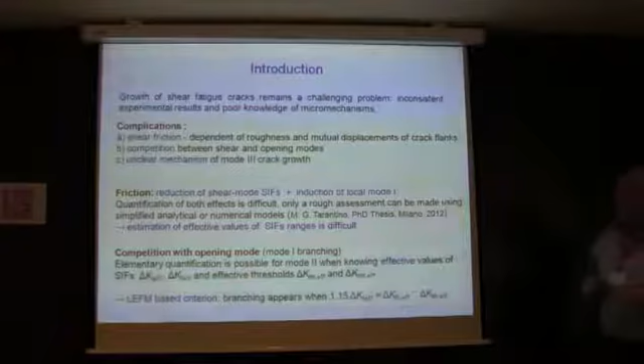Many things were done for mode 1 cracks, fatigue cracks, closure and things like mode 1, but not so much was done about shear cracks. The reasons are there are some complications, more or less stronger than in the mode 1 case.

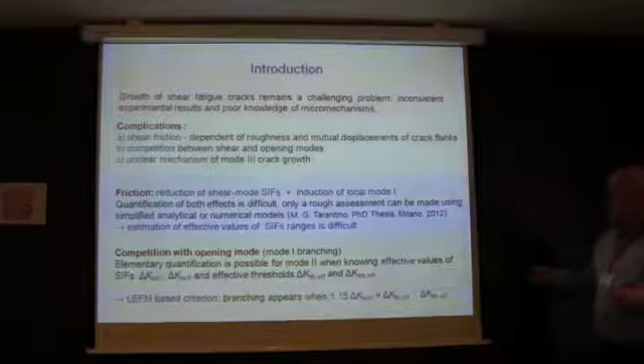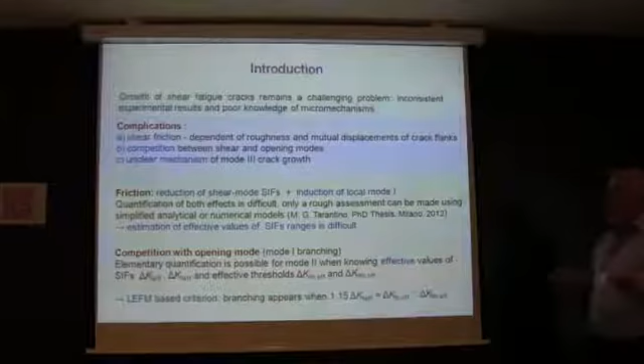First, this is shear friction, which depends on roughness and mutual displacement of crack flanks, material, and many other parameters. Then there is competition between shear modes, especially both shear modes 2 and 3, and mode 1. There is also a more or less unclear mechanism of mode 3 crack growth in a shear case.

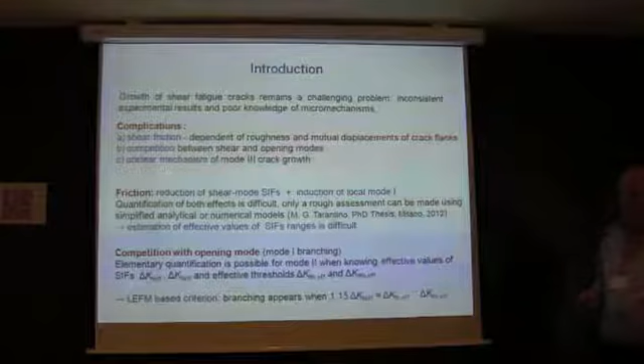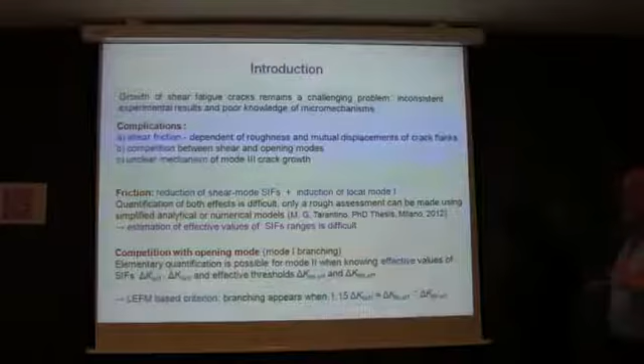The friction reduces the stress intensity factors at the crack tip, and moreover, it induces a local mode 1. So this is a quite complicated case, and quantification of these effects is difficult. Just rough assessment can be made using some analytical or numerical models.

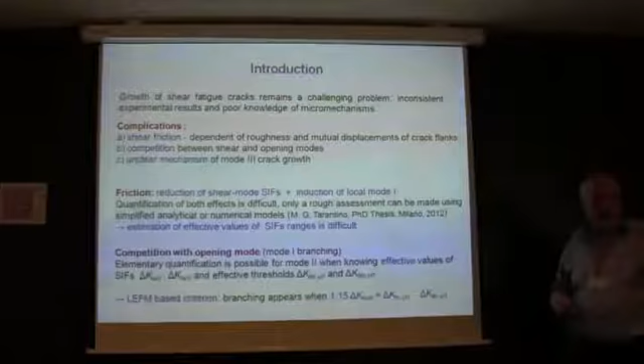An overview was done, for example, by Tarantino. I was in Milan at that time, and that was a good PhD thesis. But the estimation of effective values of stress intensity factors due to that problem is rather difficult.

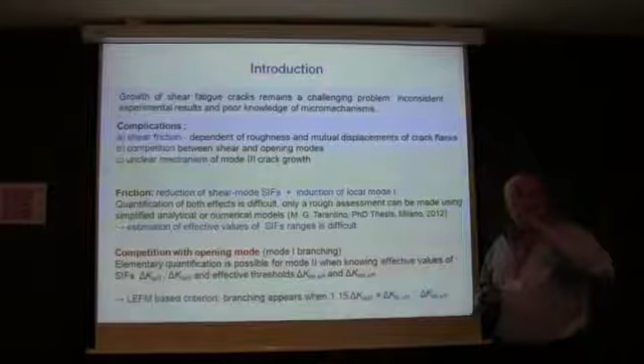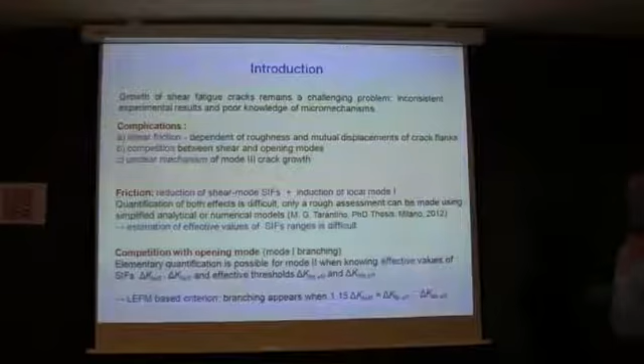There is a competition with opening mode, because some shear cracks tend to branch into the mode 1 direction - that's a well-known phenomenon. Elementary quantification of this effect is possible, but you have to know the effective stresses again.

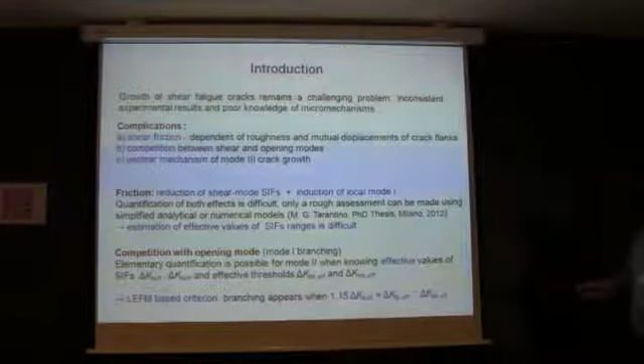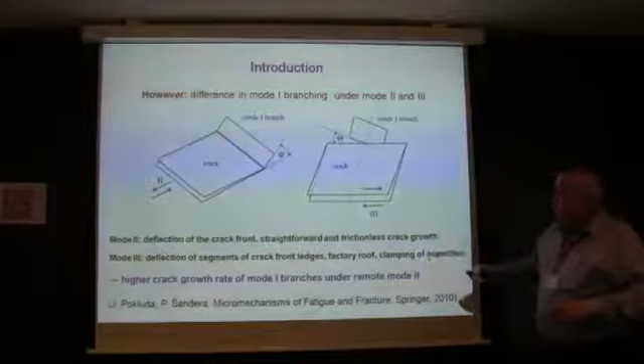Now there is a difference between these two modes in a geometrical sense. If you have just mode 2, like this, in the ideal case, the crack can deflect like this, and you get a common line between the crack and the branch - so this is not so difficult for the crack to deviate to mode 1.

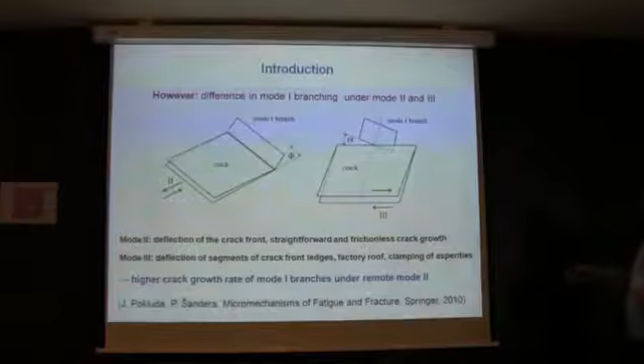But in the mode 3 case, you actually have to twist the crack to get the mode 1 support. This is more difficult because there is one point here. So in mode 2, deflection of the crack is rather straightforward, and you can get a rather frictionless shear crack growth in mode 1. In mode 3, you just have to twist the crack.

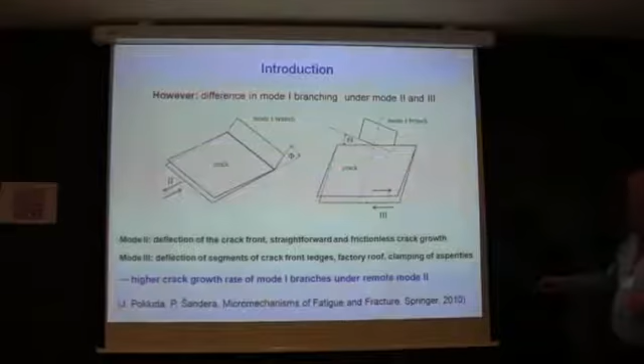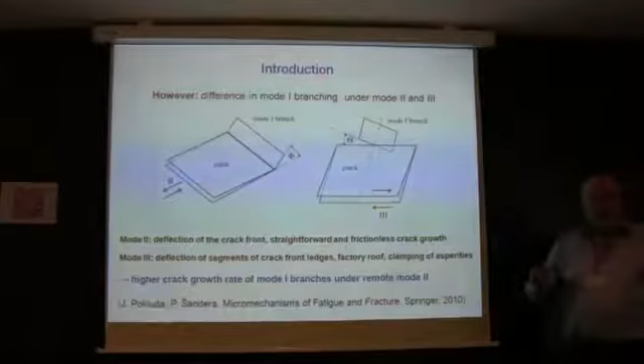This happens on the ledges of the crack, or asperities, where you can get a twist like that. This leads to a factory roof morphology in mode 1. But if you get this morphology, you have a clamping of asperities in mode 3.

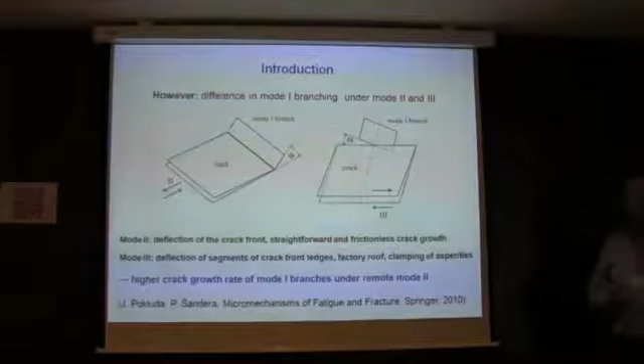This actually reduces the crack growth rate, and nowadays there are more or less good engineering applications of this case. For example, at the Gaeta conference, Tanaka was speaking about the clamping of cracks and its effects, because you get an inverse notch effect in fatigue. That was really a nice presentation.

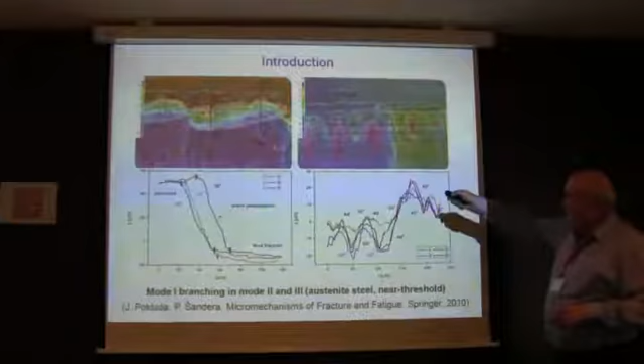Now, how does it look like? This is actually 3D stereophotogrammetry made for a mode 2 crack and branch. This is the branch, this is the pre-crack here, this is the mode 1 branch of mode 2, and this is just the final fracture. This is the profile, like this, and this is the branch - you can see that it's approximately 65, 60 degrees.

The theoretical value of the branch angle is 70 degrees, and you really get mode 1. So this is very close to this value of 70. This is really mode 1 branching in mode 2. This is in austenitic steel, near threshold.

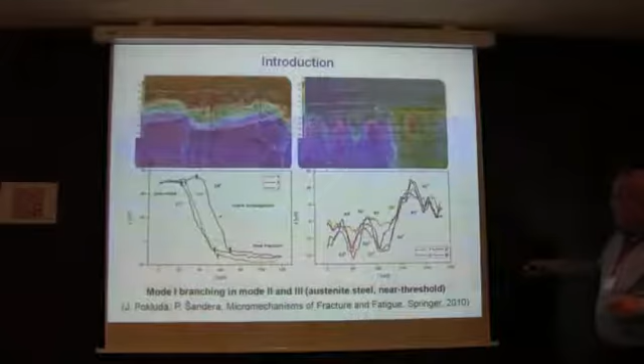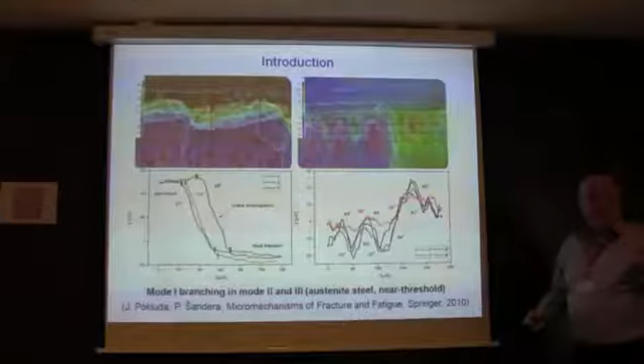And this is the mode 3 case. You see the profile like this - this is a factory roof profile. And again you get angles like 40, 45 degrees. That's the theoretical angle for mode 1 branching in twisting. So really mode 1 crack, factory roof.

But this is a big difference, because here you have a smooth crack. The crack can somehow propagate like this without any friction, but in this case it's like this - this is more difficult.

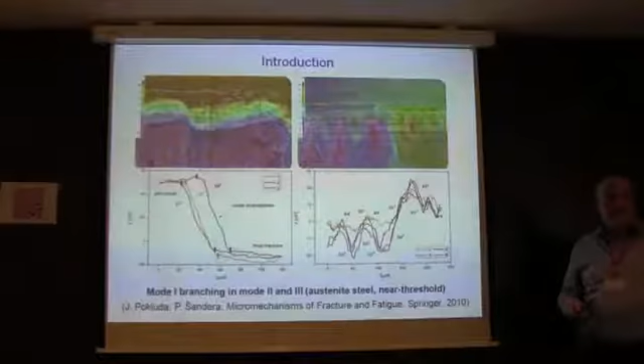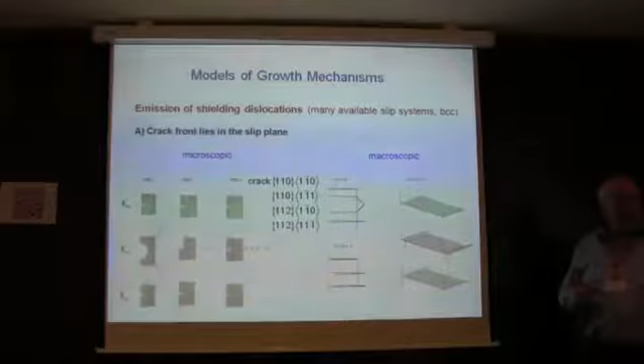Now, something about the models. Actually, at the moment you have two basic micromechanistic models of crack propagation. The first one is well known - it's emission of shielding dislocations from a crack tip, causing blunting of the crack in the mode 1 case. So this works, I will mention it later on.

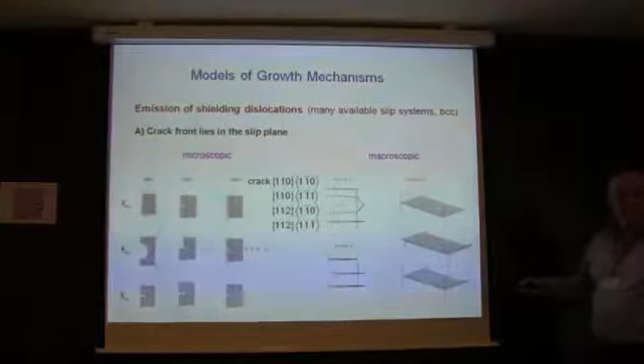This works rather for BCC systems where you have many available slip systems with small angles in between. But the models concern very simple cases - this is the simplest, well-known case. You can have a crack-slip configuration like this for BCC metals, and in mode 1, this is mode 1.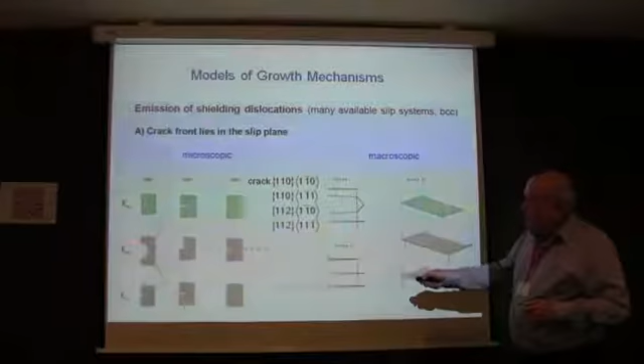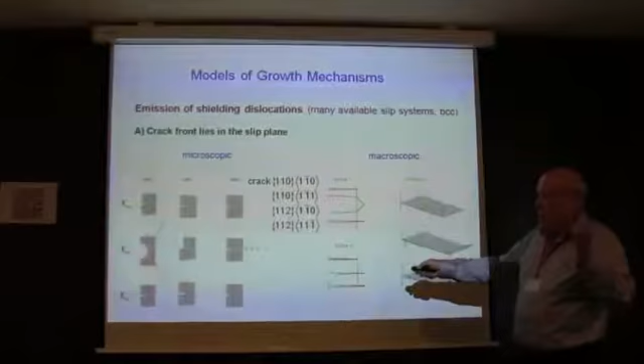So this is blunting by emission of edge dislocations, shielding dislocations, and new surfaces are created here. In mode 2, the same happens in shear - emission of in-plane edge dislocations, and again creation of new surface which is not recovered, except by environmental effects. And you can get crack propagation.

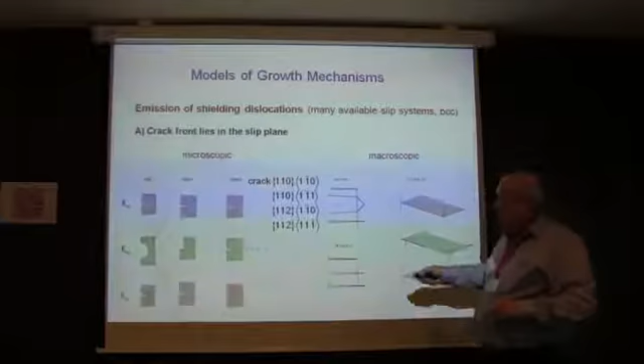But in mode 3, in this simple model, you actually emit screw dislocations, and they are not able to create any new surfaces ahead of the crack. They create - in this macroscopic model - steps at the edges, not ahead of the crack. So this simple model doesn't explain mode 3 crack propagation at all. But this is really the simplest model.

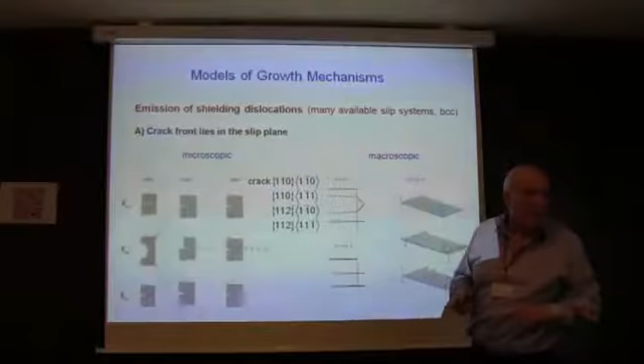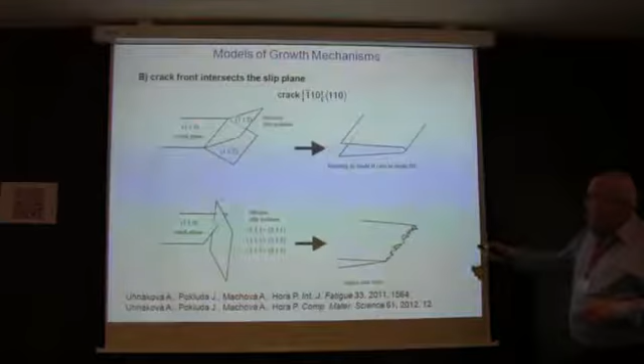You can have, of course, many other cases of slip plane configuration, especially in polycrystalline material. So we analyzed this more difficult case - a crack like this. If you have a crack plane minus 1, 1, you have two possibilities for shear cracks. This is mode 2 - you have two slip systems inclined like this.

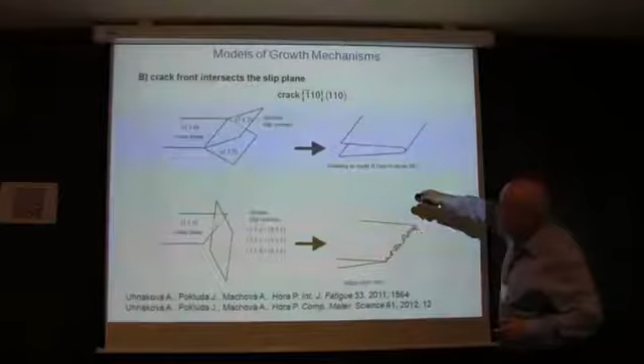So in this case, mode 2, you apply the shear like this, and you can get blunting as in mode 1. But this is not possible in mode 3, because the shear is applied like this, and the Schmid factor is 0. So this is not possible in mode 3.

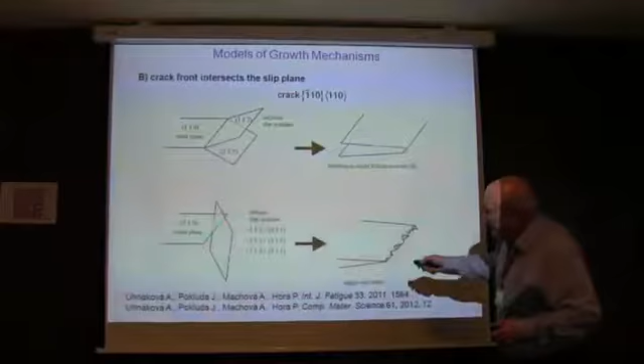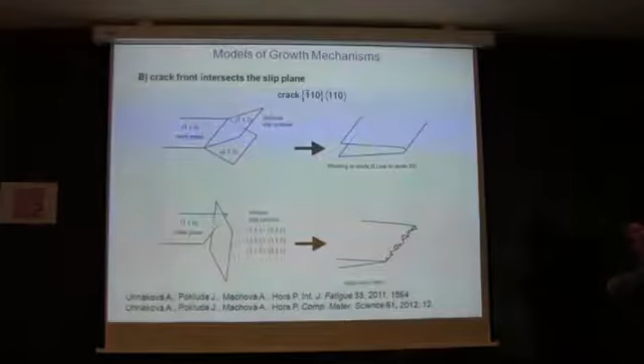But if you have a slip system like this - not deflected, but inclined, oblique slip systems, like this for example - you can get dislocations on those oblique systems, interaction of dislocations, and you get steps at the crack made by this. In a process zone here, you can get interaction of dislocations and creation of vacancies and twins, and other effects, because we modeled it with a molecular dynamics model. So you can create small cracks inside, and then the crack propagates with the coalescence of the main crack and the small cracks.

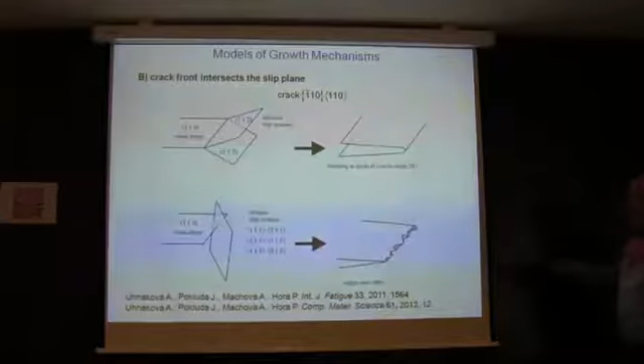So in this case, both mode 2 and mode 3 can propagate with a similar mechanism. Anyway, this was the emission model, or what we also call the deformation model.

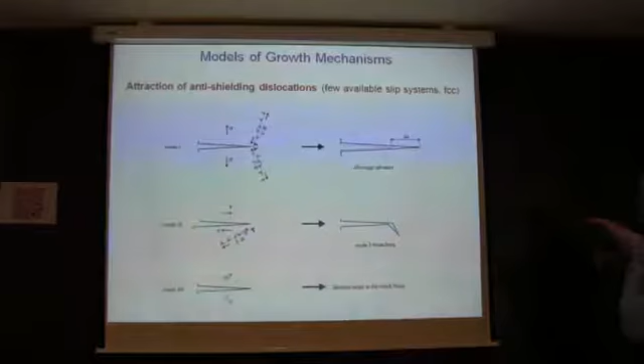But there is another model that works if you do not have too many available slip systems around the plane of maximum shear. This is the case for FCC systems, where the available slip systems are at 70 degrees, which is too much.

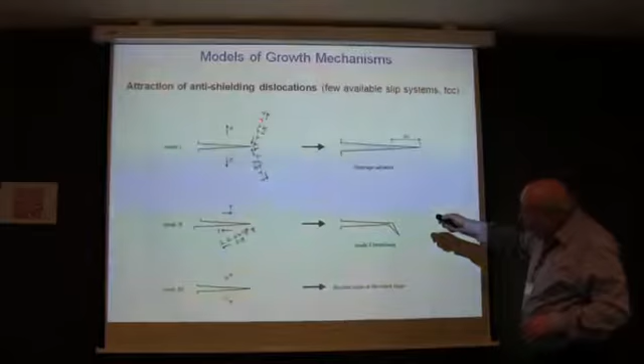And so Needleman and others proposed a model based on anti-shielding dislocations - meaning absorption of anti-shielding dislocations. They proposed it for mode 1. This involves external sources of dislocations, and in that case, if you would like to open the crack, you have to absorb the anti-shielding dislocations.

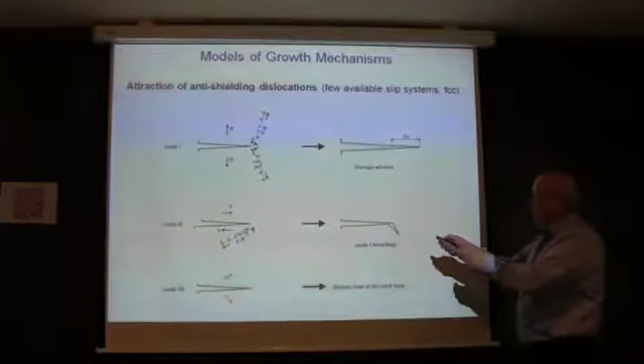So what can happen? If some anti-shielding dislocations come from the external sources to the crack tip, they apply an internal tensile stress field on the crack, which can be superimposed with the axial stress, and the crack can propagate by decohesion - say, a nano-cleavage, like this.

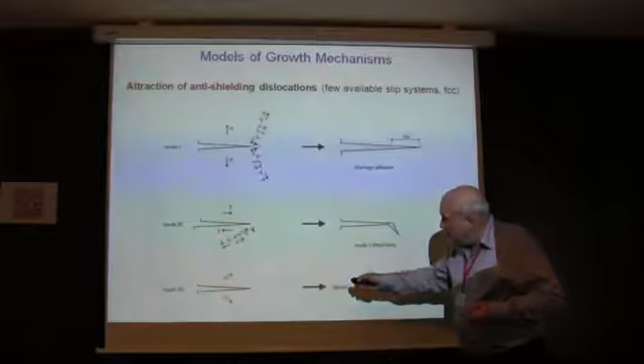But what happens in the mode 2 and mode 3 case? In mode 2, approaching it like this, you can have the anti-shielding dislocation like this.

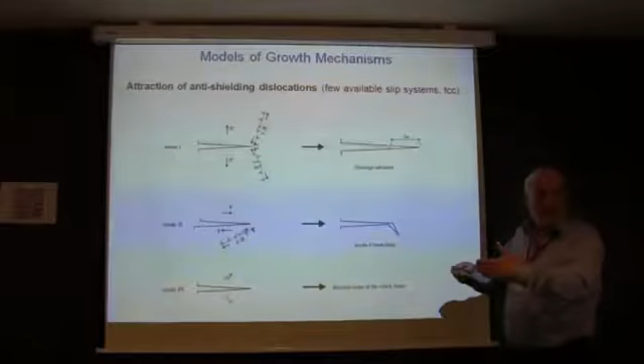The problem is that if you superimpose the external and internal crack field, you don't have any superposition of normal stresses. But if the crack would propagate like this, that's a branching, mode 1 branching. In that case, it immediately becomes a support of external mode 1, and you can have a superposition. So this model predicts a branching of the crack in mode 2.

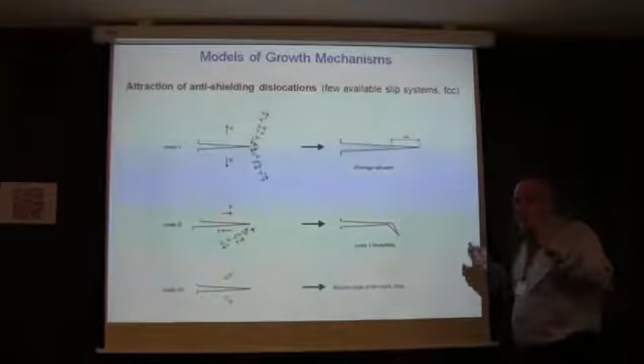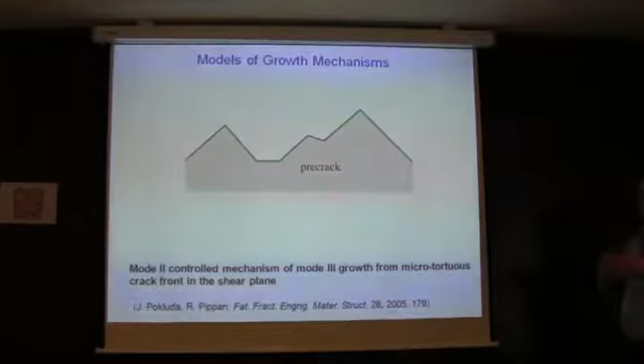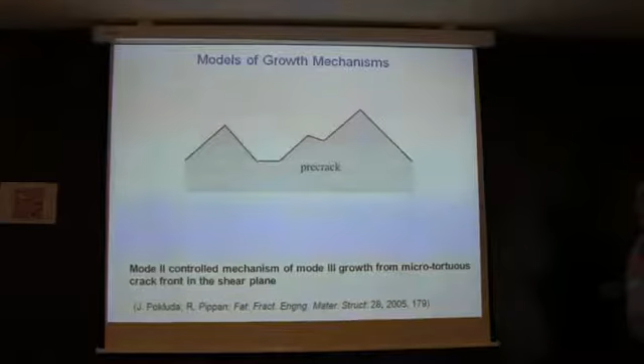So in summary, we can say that maybe mode 2 should be faster than mode 3 for many reasons I showed you. So many years ago, we actually tried to somehow explain how the crack in mode 3 can propagate just by mode 2 steps.

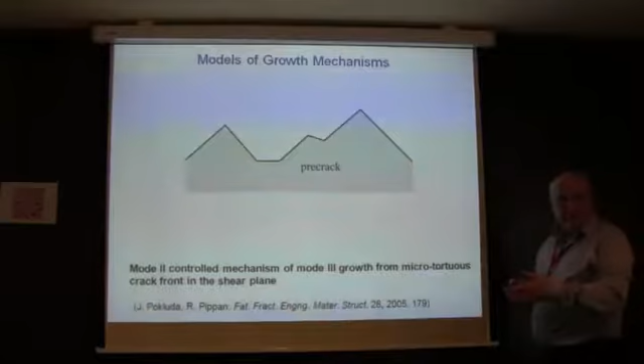Then you need a rough crack front like this, but this is always the case. The crack front in real matter is always microscopically rough. So you always have some contribution of mode 2. It's just like you have mode 3, so if you just add some resolved shear stress on these corners, this propagation is just pure mode 2.

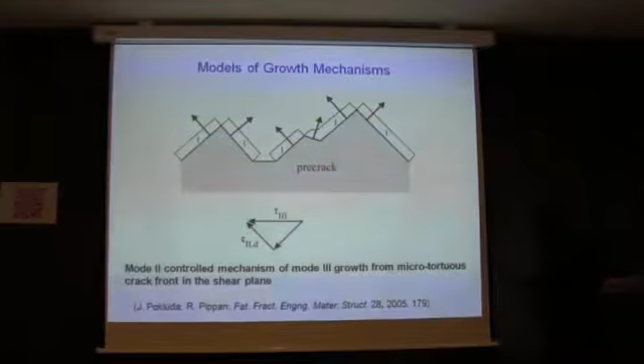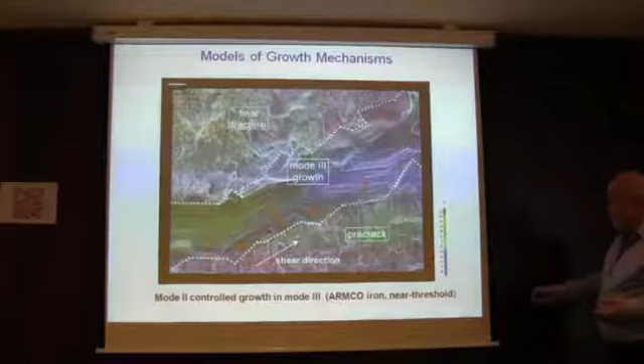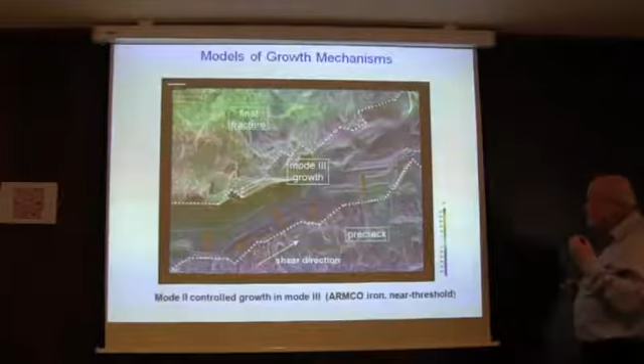Now you can see here that really in a case, for example in iron, near threshold propagation, this is the pre-crack front, like this. And you can see the propagation of the cracks like this. So this is actually not pure mode 2, but a significant mode 2 contribution from the crack front in the mode 3 case. This is a shear direction of external mode, this is mode 3, and the crack propagates like this.

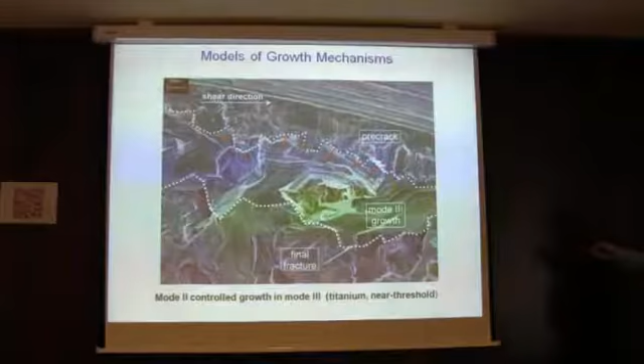And this is the same case in titanium. This is a new picture, so that was not shown in the guide. This is titanium, and you see a pre-crack front like this, microscopically rough, and you see the various kinds of crack propagation directions.

There is another model by McLean and Ritchie that shows that if you have really a straight crack front, with no need for some roughness, you can propagate mode 3 also by mode 2 if you have particles and the decohesion of particles, and the mode 2 cracks can propagate like this.

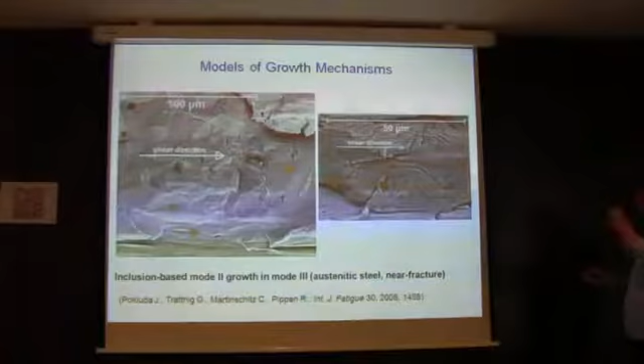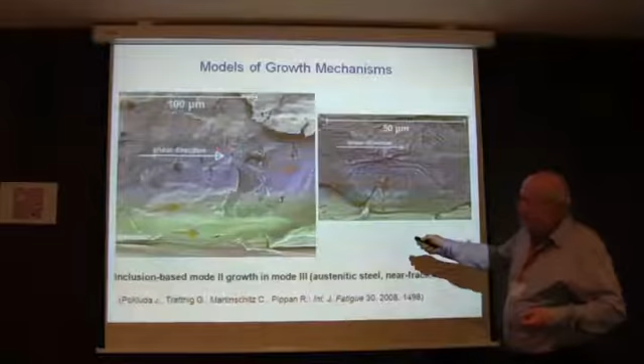This is experimental evidence of the fact that if you have some particles, inclusions like that, this is a shear direction like this, it's mode 3, but you always have some mode 1, so you can get the striations. It's austenitic steel near the fracture region, so that's high applied stress, so you can see the striations, and the crack propagates like this. So this is mode 2 propagation, not mode 3, along the crack front.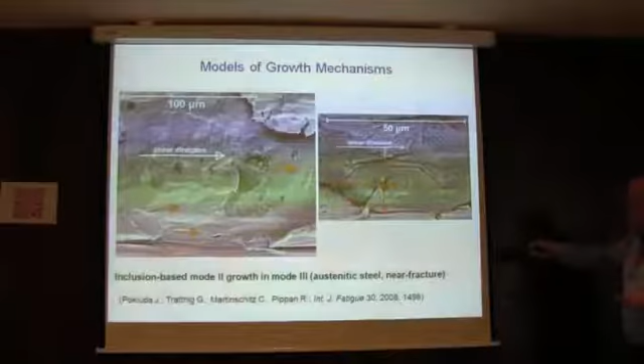And this is also interesting, because you have here an inclusion, and you can see the propagation in mode 2 this way, and mode 3 this way. And you can see that the mode 2 propagation is faster than mode 3, even if in this case the K2 factor was a little bit less than the K3 factor.

Okay, so summary about the models: mode 1 branch can propagate easier under mode 2 loading than under mode 3. Models rather indicate faster crack growth and lower thresholds for mode 2 cracks compared to mode 3 ones. And there is still a lack of reliable experimental comparison of mode 2 and mode 3 crack growth in the near threshold region.

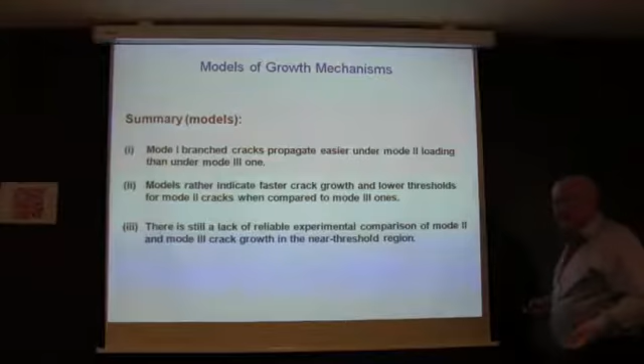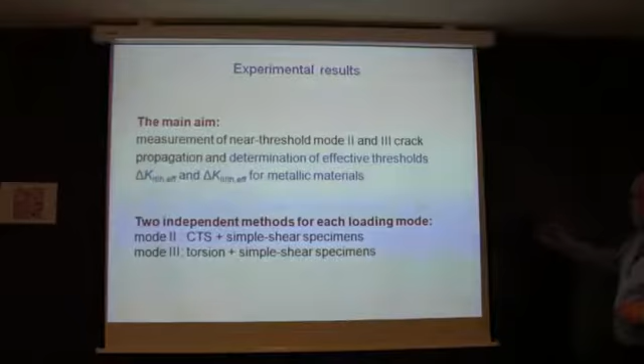So we actually focused on this, and the other problem is to find the effective values without shear closure, but it's not so easy. There were many things done in the past with application of tensile stress to open the crack and so on, but this is always a mixed mode, and it's not quite correct maybe. So the main goal was measurement of near threshold mode 3 and mode 2 propagation and determination of effective thresholds for these cases.

And so we did very careful experiments for each mode, for two different geometries of specimen and cracks, so that we were sure that everything is okay, that it's transferable, for mode 2, for mode 3.

I will not go into detail for these cases, but three materials: alpha iron, austenite, titanium - BCC, FCC, and HCP structure. And so we try to do something to separate or to delete the closure problem.

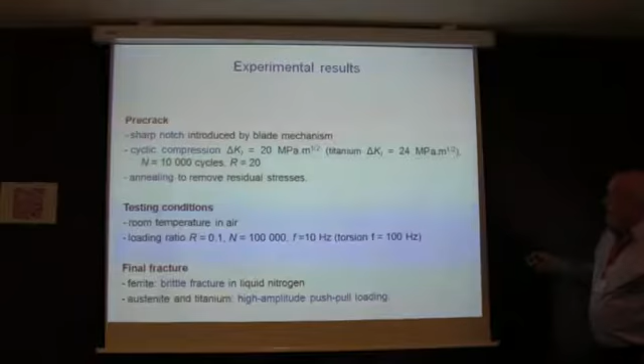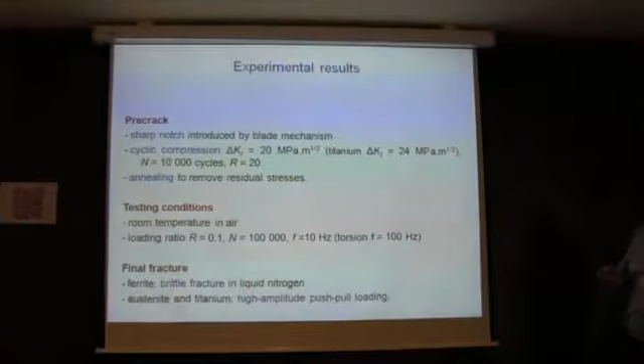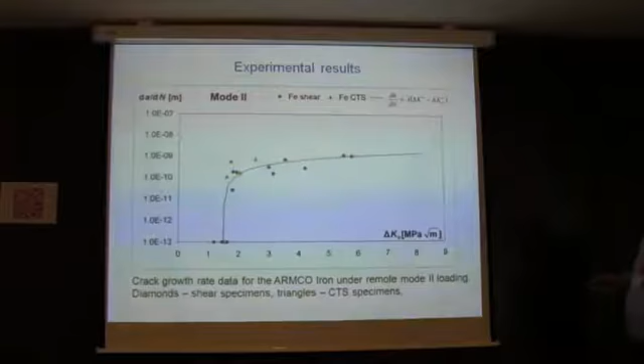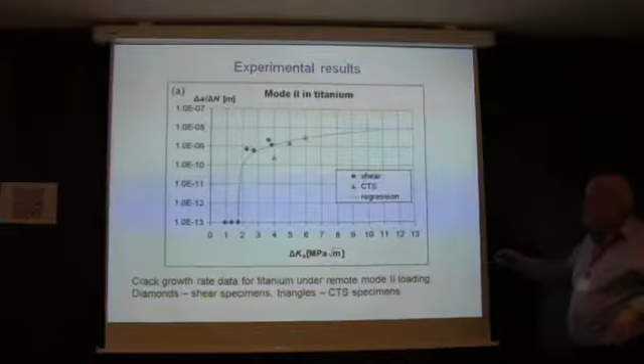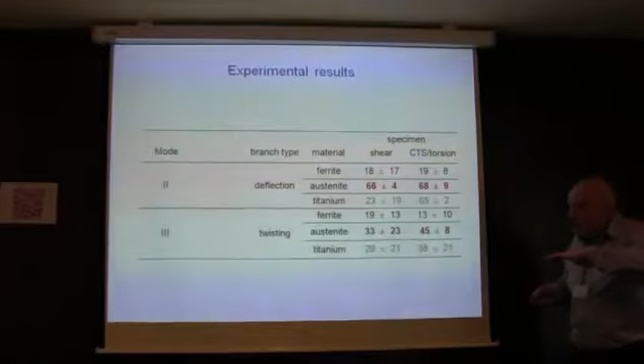In austenite, this was the case: mode 2, mode 3 deflection, twisting - very theoretical value, 70%, very close to that. Mode 1 branching in austenite. In ferrite, very flat surface - practically the crack goes in shear mode along the maximum shear stress plane. And in titanium, there was something in between ferrite and austenite.

So in ferrite, the micromechanism of the crack growth corresponds to the emission model of shear dislocation, because that was actually a shear mode, right? And the branching condition - I showed that similarly, the simple branching criterion is by far not fulfilled, so the crack could not branch according to this simple criteria. That's okay, there are many easy slip systems in this case.

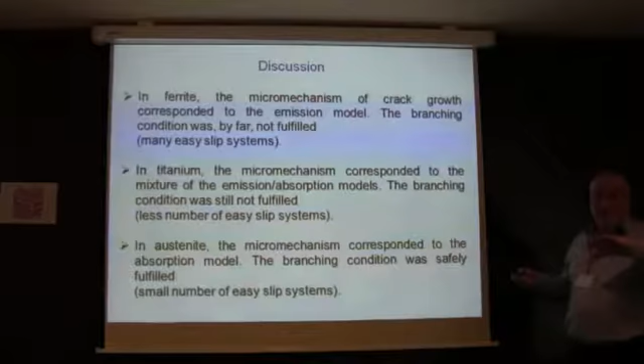In titanium, the micromechanism corresponds to a mixture of emission and absorption models. The branching condition was still not fulfilled, it was on the boundary - fewer numbers of easy slip systems, we say. You have a basal plane in HCP metals and two other planes, pyramidal and the other slip systems. These two are not easy, and the basal is easy.

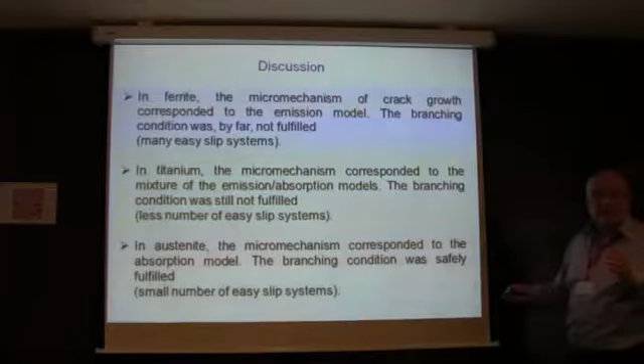So something in between. In austenite, the micromechanism corresponds to the absorption model, the branching condition was safely fulfilled, so branching occurred in this case. This is just the last point I would like to mention.

Actually, we don't know if we have really reached the effective values, but if you have an atomistic model for a geometrically ideal, straightforward crack - flat, crystallographically flat, atomically sharp crack in a perfect iron crystal - according to this, if you apply monotonic loading, you get this K1C value for iron, 0.7.

If you think about a fatigue threshold, you need some dislocation emitted to turn back to the crack tip. This actually demands a somewhat higher applied delta K effective when the R ratio is 0. This was calculated at about 1 megapascal. So this is really a perfect, effective mode 1 value for iron from atomistic calculations.

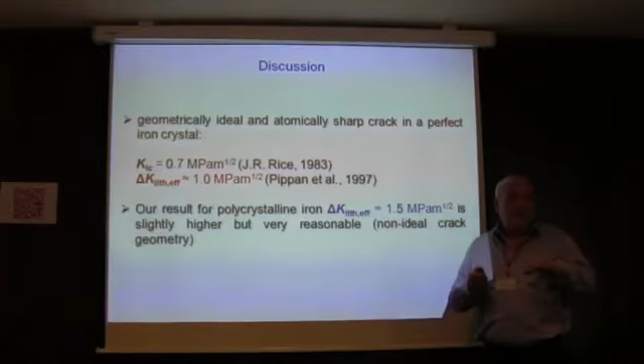And our result for polycrystalline iron, as you could see, is 1.5 megapascal. So the difference is not so far away from that, and it's understandable because you do not have ideal conditions - some blunting of the cracks, it's not ideally sharp, and other factors, so some higher values could be expected. So we believe that we really reached the effective values of the thresholds.

Okay, so let me conclude. In alpha iron and titanium, mode 3 cracks predominantly propagated along the shear plane in local mode 2, but in titanium the deflections were higher, and mode 2 cracks grew in local mode 1 plus 2 plus 3. In austenite, mode 2 and 3 cracks immediately formed mode 1 branches, deflected planes, and factory roofs, as you could see before. For mode 2 cracks, the branching condition I showed was clearly fulfilled here.

So it seems to work, and effective thresholds for mode 2 were higher than those for mode 1.